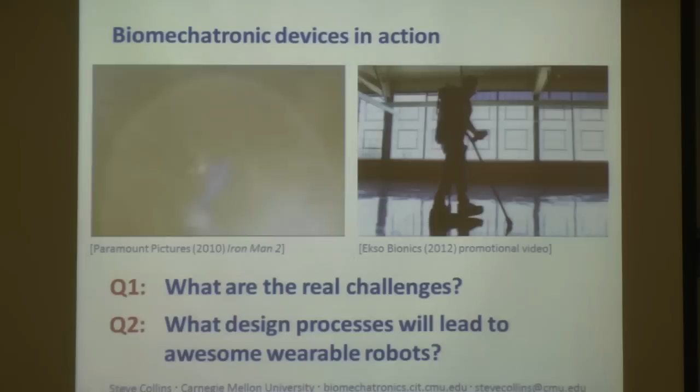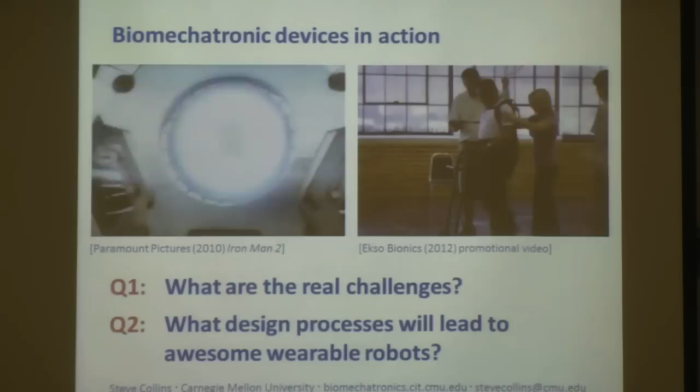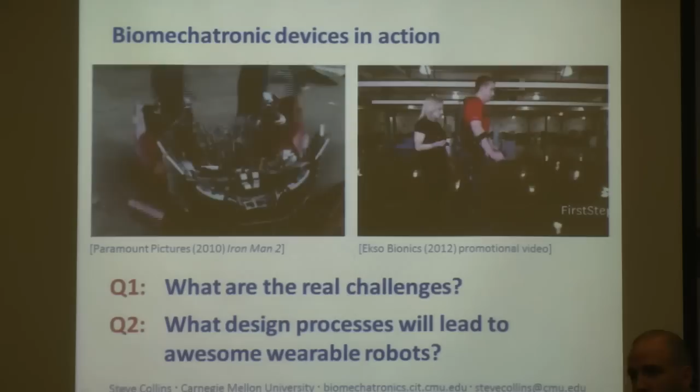And the second question, kind of a corollary, is: if I gave you a big pile of money and a talented team and five years and said go out and make real progress in this field, build a foundation for future work, what would you do? What kind of processes should we go through that have a high probability of success and make lasting impact? I'm going to argue that what we do in that exact scenario is ineffective and inefficient, and I think it's partly responsible for our slow progress.

And I'm going to propose an alternate process that I think has better potential. I think the best way to make this case is to take you along the path that I've taken to coming to this conclusion. And it starts a long time ago, in time with poor graphics, in a lab where we were using very simple models of locomotion to try to understand robot walking.

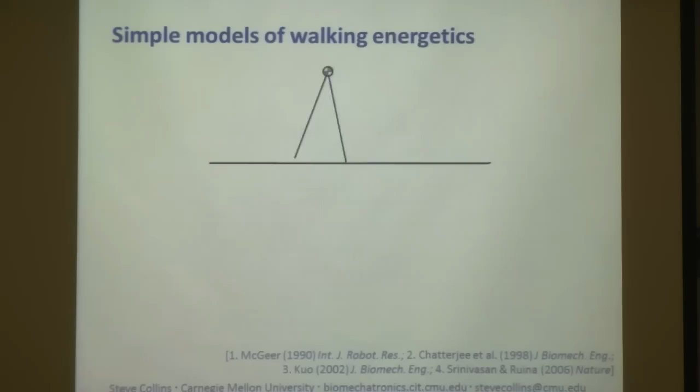This is arguably the simplest model of walking. We have a point mass representing the body, inextensible legs with negligible mass, gravity, a ground, and cyclic stepping. In this very simple model, we can make some statements about energy use.

First, the best thing to do during the middle of the step is nothing—vault up and over your stance leg like a pendulum. But at the transition between steps, you have to redirect your center of mass velocity. If you do nothing, your leading leg will land, you'll have a collision, and you'll dissipate a bunch of energy. Since this is a steady state behavior, every joule of energy you dissipate has to be resupplied at some point in the gait cycle. It turns out the most efficient way to do that in these simple models is by push-off of the trailing leg, because that partially redirects the center of mass velocity and thereby reduces the collision and the overall mechanical energy requirements.

So inspired by these models, we wanted to build more efficient walking robots. At the time, and actually to this day, most walking machines use an order of magnitude or many orders of magnitude more energy to get from A to B than a human. And coincidentally, almost no walking machines embody any of these principles.

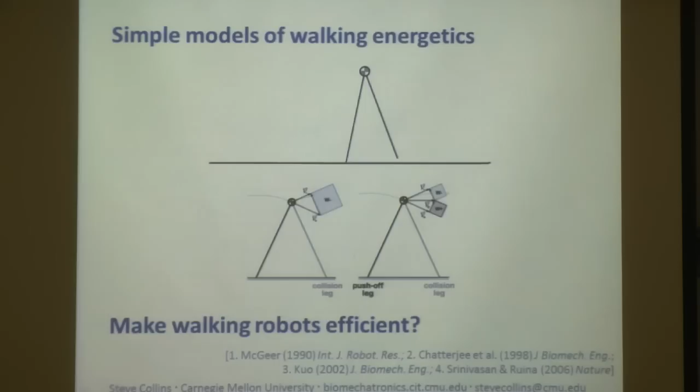So we designed a machine that does, and it looks like this. It's mostly passive—there's a hip with no actuation or control, knees that have almost no actuation but little latches to keep them from buckling during the middle of the stance phase. And all of the energy is supplied at the ankle, once per step, through trailing leg push-off.

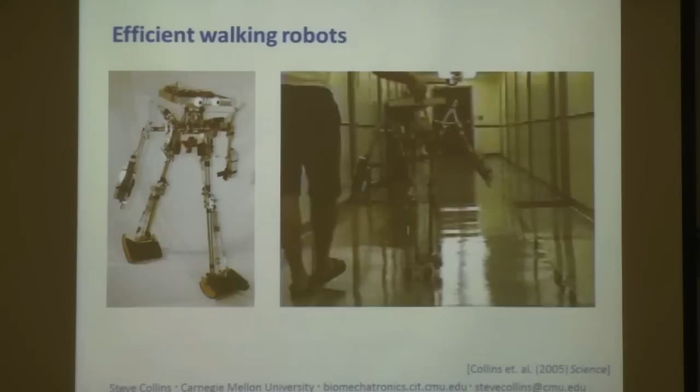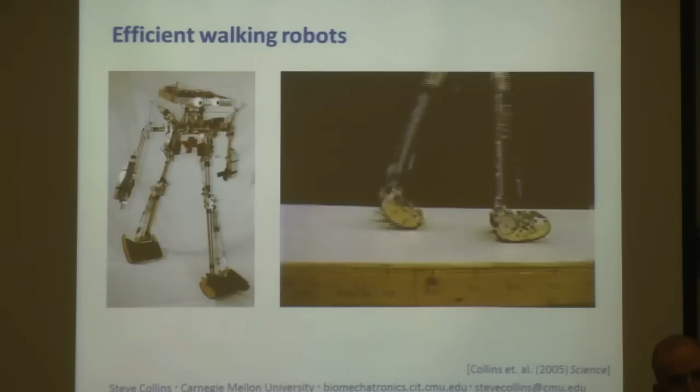Oh, can I get here? Yeah, and you can see that best here. So you see, just as the leading leg is about to land, the trailing ankle will move a little bit—that's it, that's how we inject energy into the system. And using these strategies, we're able to match the cost of transport of human walking.

This is cost of transport, energy used per unit distance traveled and unit weight. Our machine had a similar value to that of humans, and 15 times lower than ASIMO, which at the time was the most efficient walking robot in the world. So we were very excited about this result.

I was especially excited because I thought maybe we could take this and use it in devices that directly assist humans. But first, let's take a look at natural human walking and see if any of these ideas are relevant.

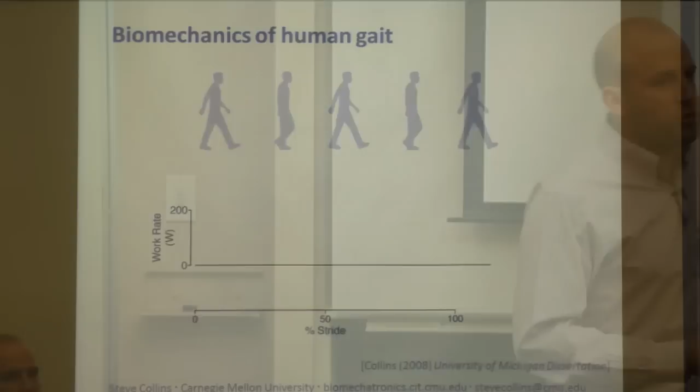Humans are very complicated. We're a big pile of cells with hundreds of muscles, and each muscle has lots of fibers, and there are all these neurons, a very complicated thing. So we use a couple of abstractions to try to understand the mechanics of gait from a mechanical engineering perspective.

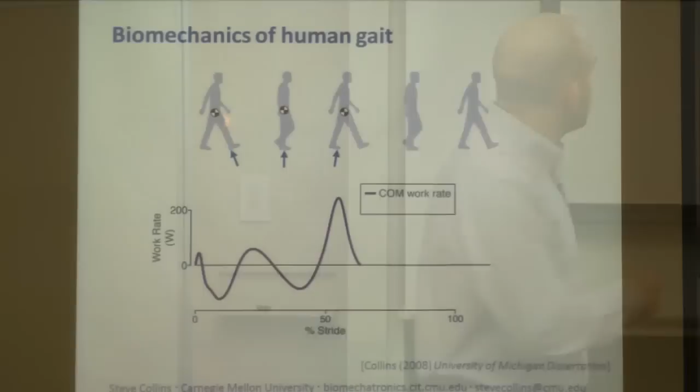One is to look at center of mass work. If we consider the center of mass of the body, and everything between the center of mass and the contact of the ground as a leg, we can get a rough understanding of the work done by that system by taking the dot product of the velocity of the center of mass with the ground reaction force. When you do that for each leg individually, you get curves that look like this.

I'm going to show lots of curves where we have time on the x-axis, normalized to percent stride. Typically these will begin with heel strike of the leg we're looking at, and 100% will be heel strike of the same leg, the subsequent heel strike.

If we look at the work performed by this effective leg, you get this initial negative work phase, some stuff in the middle that I want you to ignore, and this big positive work phase at the end of the step. Looking at this through the prism of our simple models, maybe you can think of this as being the trailing leg push-off, and it happens just about the same time, a little bit before this other thing, this negative work phase, by the leading leg, which maybe we think of as collision. So perhaps these ideas are relevant to human walking.

Another way to look at mechanics of gait in humans is to consider the body as a set of rigid links and look at the work done at joints, using inverse dynamics analysis, for example. When we do this and look at the joints of the lower limbs, one joint in particular seems to account for most of that push-off, and that is the trailing ankle.

So we wanted to see if there was a population where we could apply these ideas and maybe improve performance. Something that jumped right out of the literature is people with lower limb amputation. When you have part of your leg removed, you typically are fitted with one of these conventional passive elastic prostheses.

Now, 20% might not sound like a lot at first, but that's about equivalent to wearing a backpack with 20% of your body mass in it all the time. In my case, like a 35 to 40 pound backpack, depending on the time of year, wherever you go. And a lot of times I will avoid carrying my 3-pound laptop across campus. So 20% is a very big, meaningful change.

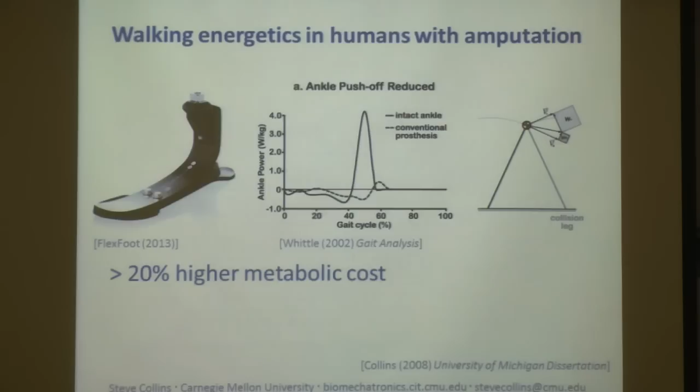So we thought, if we increase that trailing leg push-off, can we make it easier for people with amputation to walk? One way to do that would be to take a big motor and battery and stick it on the ankle and just drive that push-off phase.

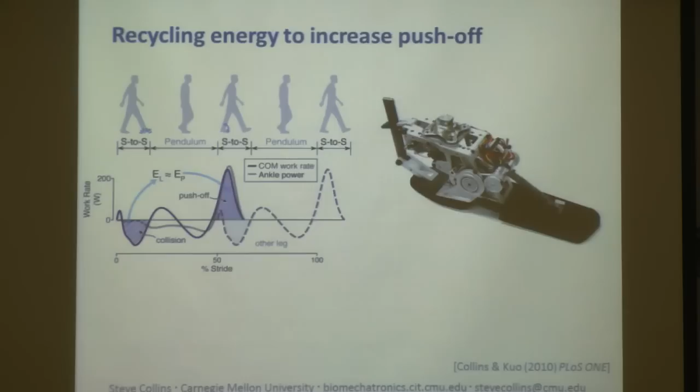But we noticed that the energy dissipated during this collision is of a similar magnitude to the energy required for push-off. We thought, maybe we can capture some of that energy that's normally dissipated and recycle it usefully for push-off. So we designed this very specialized prosthesis to do just that. You can see right at heel strike, this big spring here is compressed.

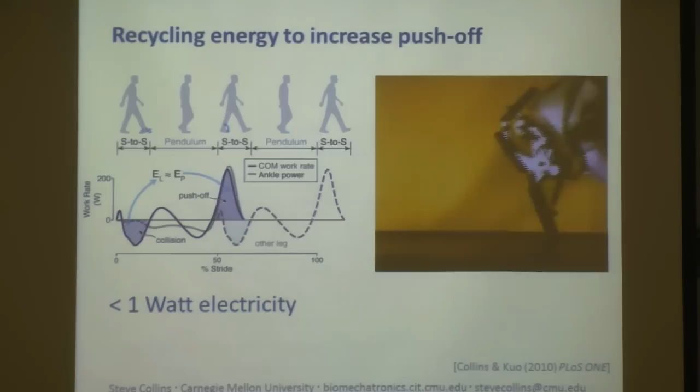It stores a lot of energy. That energy is locked in place. Later in the step, a separate latch releases the toe. The toe vaults forward, and all that energy is returned to the person's body.

Using onboard sensors, we could tell that we are indeed capturing and returning energy as we had wanted, which is cool. But does it provide the expected benefit to human users? Well, the only way to figure that out is to perform an experiment on people, and that's what we did.

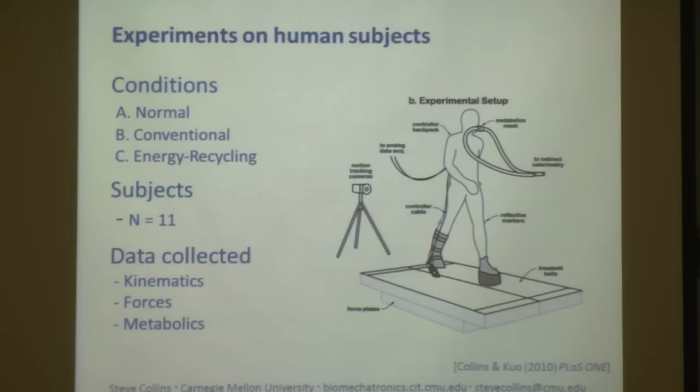So we collected some pretty typical biomechanics measures. We had people walk on an instrumented treadmill that measures their ground reaction forces. We measured the positions of their body segments using a motion tracking camera. We measured the oxygen and carbon dioxide that they consume by sampling the gases that they breathe. And this is what that looks like in hardware.

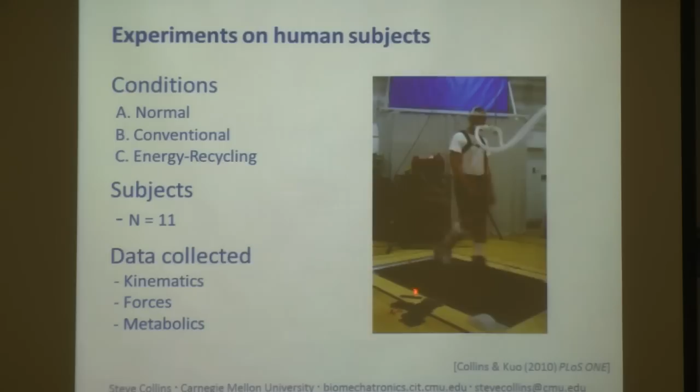And we considered 3 different conditions. First, we had people who are not amputees participate in the study, and we simulated amputation in some conditions by locking out their ankle joint with a simulator boot that has a little attachment on the bottom to which we can attach different prosthetic feet. We compared biomechanics outcomes while people walked in their street shoes, while they walked with one of these conventional prosthetic feet, and while they walked with the energy recycling device.

As expected, when walking with the conventional foot, ankle push-off work was reduced, and center of mass push-off work was also reduced. The energy recycling foot captured energy that would be normally dissipated, then returned it, which resulted in increased ankle push-off and increased center of mass push-off. At the same time, we observed the energy penalty for walking with simulated amputation was reduced.

So this is the energy cost for walking in street shoes. When people put on the simulator boot and conventional prosthesis, energy cost went up by about 23%. With the energy recycling foot, energy cost was only 14% higher. So you could say it's a 10% reduction in energy cost.

The design of this device took 5 years before it was robust enough to withstand the about 100 hours of testing and training required to get the outcomes that we care about. Any change that I want to make to that device takes, optimistically, months, and realistically on the order of a year to implement and refine and get it robust enough to test.

And that leads me to my first point, which is specialized devices like this one are not good experimental tools. They do one thing really well, and they strongly limit the types of experiments you can do.

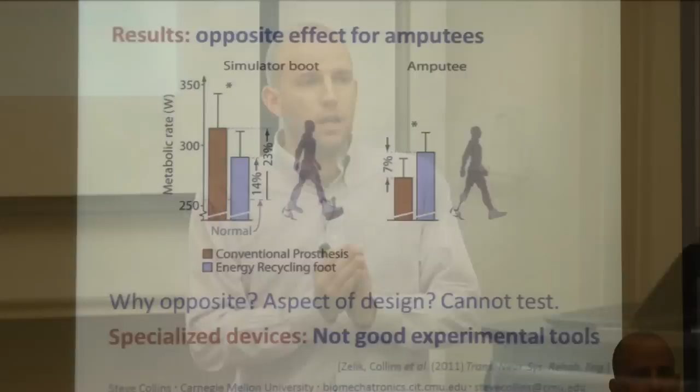One of the factors that we think might have been important in these experiments is the shape, the effective rollover shape of the foot. And as we were refining our energy recycling foot, we discovered that if we put little pieces of foam on the bottom, it felt a lot easier to walk on the device. Later on, we actually did a separate experiment where we systematically varied rollover shape in a controlled way and found that can make a very big difference, 50% change in energy cost or more.

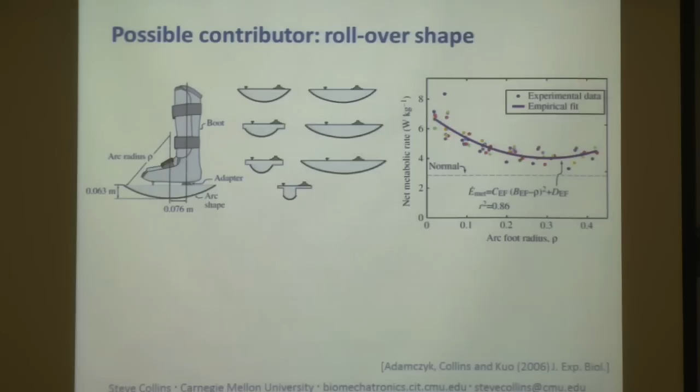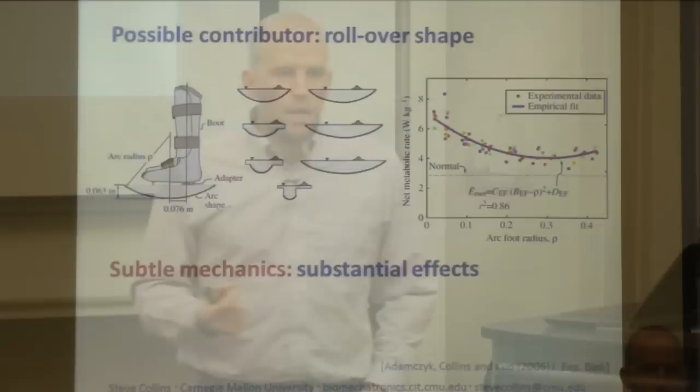We didn't think when we set off on this that those kinds of factors would be important. And that illustrates an important point: people are so complicated and unpredictable that very subtle factors can be really important, things you wouldn't expect. It also illustrates that as we're designing and refining these specialized devices, secretly we were performing an optimization, but we didn't realize that the thing we were changing was important.

And we probably did this in lots of ways, right? There are all kinds of choices you have to make in the design of these devices that we didn't think of as being most important, but may have had a strong impact on results.

That leads me to a third observation: when you perform an experiment that is an A-B comparison, this complex device versus that complex device, and there's a change in some performance measure, we really wanted to say the reason for the change in energy cost was the energy recyclingness of the energy recycling foot, right? But maybe it had nothing to do with that, and it was about stiffness of the keel, or stiffness of the spring, or rollover shape, or something.

So if we look back over this, which is a very typical example of the development process used in biomechatronics right now, and look at the tools available to us, here's how I would assess them. What good are simple models and intuition? Well, we need them, right? You need them to develop hypotheses, to inspire designs, and to help you interpret results of experiments. But they are not good enough to lead you to the design of an effective device.

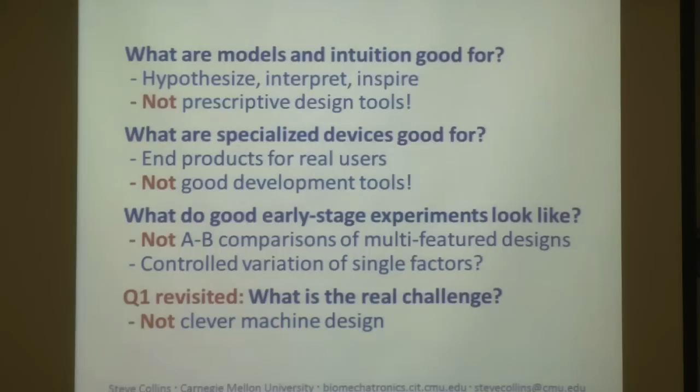Which brings me back to the very beginning. What is the challenge? What is hard about developing these devices? I would argue it is not how to design specialized robots, right? Over the last several decades, we've gotten really good at making machines that meet design requirements. We've got CAD tools, we've got finite element analysis, we've got dynamics simulation software. All that stuff helps us make very good predictions about whether something is going to work or fail. And we're very creative and good at these problems. We like these problems.

But that is not the real challenge. The real challenge is predicting how the human will respond to forceful interactions with these devices. And that's where we don't really know what's going to happen. Another way of putting it is the Tony Stark problem, right? As roboticists, we get really geeked about the tech side, how to make the thing do what we want. But we haven't asked what functionality we should be using. We haven't answered that question adequately yet. And that's what our research is seeking to address.

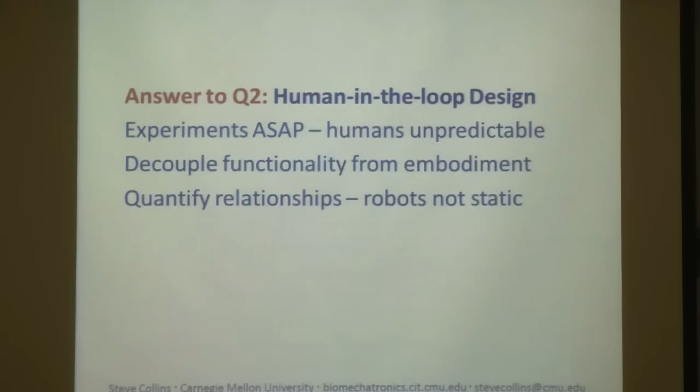I think the way to do this is what I like to call human-in-the-loop design. Get to experiments with people as fast as possible, because that's where all the new information comes in. Close the loop as soon as possible. And try to decouple the functionality you're testing from the design of a specialized device, so that every time you change something, it doesn't require years of development. And finally, instead of doing little data points, try to quantify design relationships.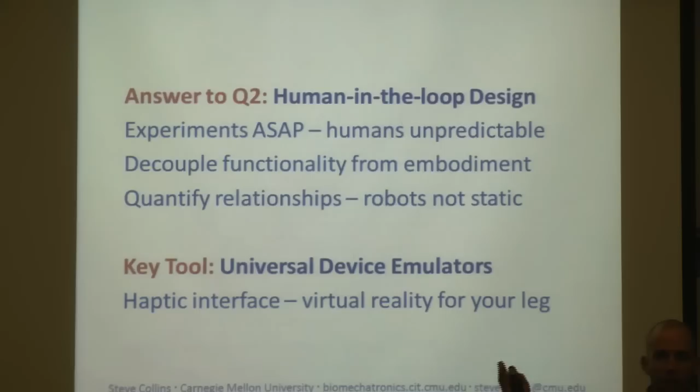The tool that we think enables this approach is something we call a universal device emulator. It's like virtual reality for your leg. It's a haptic interface: you put it on the body, and it pretends to be some proposed wearable robot design. Then you can evaluate that, and you can change aspects of it in a controlled way and see how people respond.

So we built some of these, and here's one. This is a universal ankle-foot prosthesis emulator, and it has three main components. First, there is a lightweight end effector worn on the body.

Second, we have a tether that connects to very powerful, capable off-board motor, actuation, and control hardware. This is what it looks like in our laboratory, which I share with Hartmut Geyer down in the basement of Wean. This is our 2 kilowatt AC servo motor, weighing in at 15 kilograms. Lots of power, right? You can see the tether and stuff a little bit better in this picture. Here we have a Bowden cable coming in.

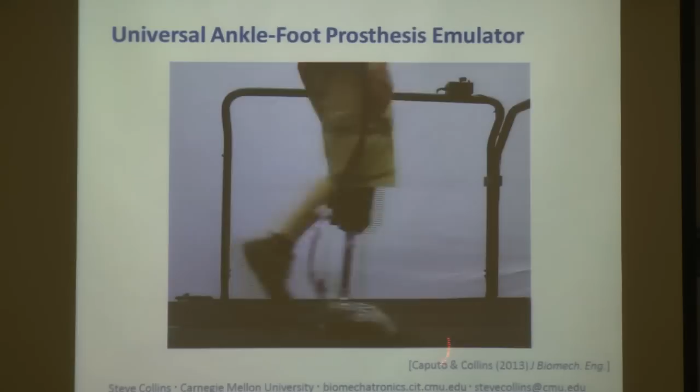That's how we transmit mechanical power. And this instrument end effector, the person walking here is a unilateral transtibial amputee.

You can see the end effector a little better if we slow things down. It has one axis joint. We sense the position and we sense the torque using a spring, measuring the position of both ends and calibrating that measurement, along with a series elastic element which helps us achieve good torque control.

Now I claim that this is going to enable us to be versatile and high performance, and here's the proof. We've done some benchtop tests and found that we can measure the torque really accurately, and we can change the torque very fast.

This is a step response, a rise time of about 60 milliseconds, going from 0 newton meters to 175 newton meters. For the uninitiated, a typical peak torque during walking at the ankle is like 100 to 120 newton meters, so that's a big torque.

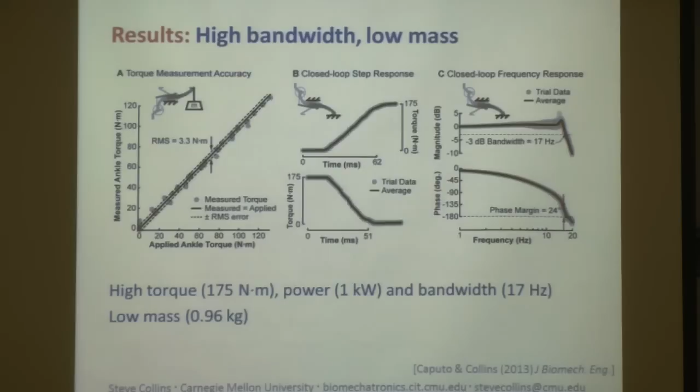One of the keys in a haptic interface is the closed loop torque bandwidth. That provides a limit on the fidelity with which you can emulate different dynamic elements in the design. Here we have a bandwidth of about 17 hertz, and the whole part that you wear on your body weighs less than 1 kilogram.

If we have a person walk using some control algorithm that I'll explain more later, we see there's a good match between the measured torque, which is the blue line, and the desired torque, which is the black dashed line.

If you look at it either in time domain or in this angle torque domain, we see a torque error of about 3 newton meters RMS.

Taken individually, any of these outcomes is at least twice as good, significantly better than any other prosthesis or exoskeleton for the lower limbs to date.

And when you look at the set of outcomes, we're typically an order of magnitude better, at least one better than everything else. And that's not because we're the cleverest mechanical design people, although we're not bad at that.

But it's because if you exploit the laboratory setting, give up on autonomy, stop trying to pretend to be a product, and embrace the fact that this is an experimental tool, things get a lot easier.

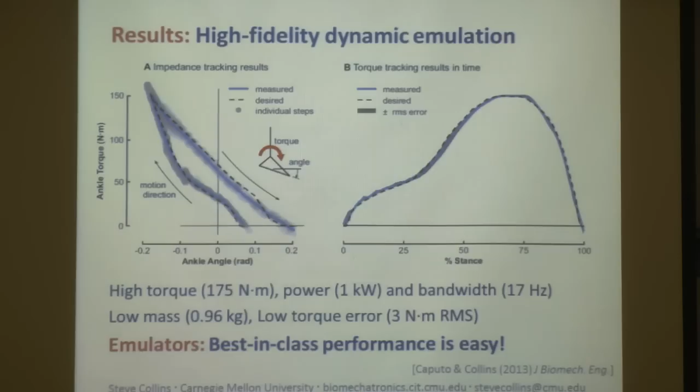Now, why should you care about this? Why is this cool? Number one, you can go from an idea for an assistive device to a test on a person in hours, not years. So many orders of magnitude reduction in time.

You don't have to be good at building stuff, and I say this in a room with lots of computer science people. All you have to do is code a little bit, and the device will express your ideas. If you are a builder, it's way easier to design these end effectors than an integrated system.

We've taken away the need to have control on board, energy on board, or actuation on board. Once that part of the system is solved, all you need is some mechanical structure that supports and moves around, and a little bit of sensing.

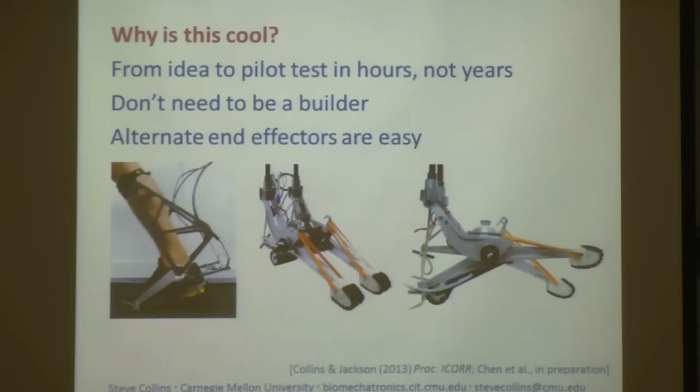These are a couple of end effectors that we're currently using. This is an ankle exoskeleton, and this is a 2-degree of freedom prosthesis that does both plantar flexion and inversion, eversion, or pitch and roll if you like.

We're really excited about these platforms, not only for research, but as potentially commercial tools for a clinical setting, where with the right interface, a person could use these to let a potential user of a robotic prosthesis or exoskeleton try different devices available on the market before they're prescribed, and even tune parameters for those devices so the person can experience it before it's built.

To give you a point of reference, the BiOM, which is maybe the most advanced prosthetic ankle on the market, costs over $100,000. So before you mortgage your house, you want to make sure that this thing is going to be effective for you.

Now, we're also, of course, interested in using this as a research platform. I'm going to tell you about a few experiments that we've been doing, one in a lot of detail, and then I'll touch on a few other experiments we've been performing in our lab.

And the first is about ankle push-off work. So let's come back to this idea of augmenting push-off. We think it's important, and we think that maybe more work done by the ankle is better in terms of energy cost for the person.

But more work also implies a heavier motor and batteries, which we think is bad for performance of the person. So in order to make a rational decision in the design of an autonomous robotic ankle, we need to quantify the benefits of more work so we can weigh them against the costs of bigger motors. And no one has done this in isolation before. So we set out to try, and we designed a controller that's well suited to perform this experiment.

It operates in joint angle versus torque space. If you take normal ankle function and project it into this space, you get curves that look like this gray line. During most of the step, you have this dorsiflexion curve where the ankle is, your toes are getting closer to your knee, and torque is increasing. And then at the end of the step, you have this plantar flexion phase, and torque is decreasing. This is a displacement force space, so area under the curve is work, and the area inside the loop is the net work over the course of a cycle. We call it a work loop.

So we did that. We had 10 people walk, and here's what we found. First of all, we are able to vary the net work provided by the device over a big range, up to values approaching 4 times that of the biological ankle, so big range. This is, just to give you another perspective, power at the ankle joint, and you can see we're getting more than 2 times the peak power, so half a kilowatt at the ankle joint is lots of power.

And we measure metabolic rate, we're able to create this figure. And this is the key figure. This is the kind of figure that I would like to see lots of groups produce. This is it. This is the thing that we think matters, the functionality that we think gives some benefit, and the benefit that we think can be achieved with it, right?

In our case, the net prosthesis power on the x-axis and the net metabolic rate on the y-axis. If we put in the data from 10 subjects, and each set of colors corresponds to a different individual, we see that, as we kind of expected, increasing push-off tends to decrease the user's energy cost, which is cool.

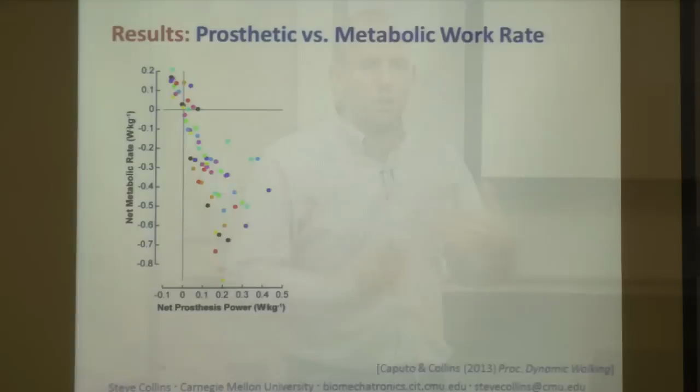There are a couple of landmarks in this space that are interesting. The first is a line with a slope of -4, which is what we might expect if every joule of work performed by the device exactly replaces 1 joule of mechanical work performed by muscles in the person's body. That's because muscles have an efficiency of about 25%. And you can see for some subjects, they're pretty close to operating along this line.

But on average, there tended to be a diminishing return as we increased device work, and this is an exponential fit to that curve. Interestingly, energy cost of the user tended to continue to go down even as prosthesis power got way bigger than what you observe in the biological ankle.

So many people have an intuition that the best thing we can do with a robotic device is exactly imitate what the biological system does, right? Now, what exactly that means, if you start to really parse it, becomes ill-defined most of the time. But even in this particular outcome measure, we see that normal walking is somewhere in here, and clearly more work by the device is better. If you reflect on it, maybe that makes sense, because the cost structure is different, right? You pay for more work by the device, but you pay for it in a different way than you pay for work performed by your own muscles.

Right now this is all data from experiments with simulator boot, and we are repeating the experiment with amputees. I think we have 5 subjects enrolled and 1 subject who's completed the protocol. The results are very interesting, but you won't hear about them today.

That sort of wraps up the experiment I want to talk about in detail. Now I'd like to touch on a bunch of other little factors that we think are interesting.

One is the timing of push-off. The amount of work in push-off is important, and the same models that predict that also suggest that the timing of push-off is important. But it's very hard to change the timing of the onset of positive power at a joint independently from the magnitude of work performed at that joint. This has confounded lots of other experiments that tried to get at these ideas.

Fortunately, when you have a 2 kilowatt AC servo motor, you can just make the joint do whatever you want, whenever you want, and that's what we did. We forced positive work onsets at very early and very late times during the gait cycle, and found that it does matter—timing matters, which we expected. In fact, with poor timing, the effect is as if you provided no work augmentation at all. That is to say, you're just throwing the energy away with no benefit to the user.

And with optimal timing, you can get a substantive benefit, which is cool. In fact, with really bad timing parameters, people have a very hard time walking.

Now, all these results so far have been for prosthetic devices. We're also interested in exoskeletons. Perhaps counterintuitively, exoskeletons offer a wider range of assistance approaches because the device operates in parallel with the person's joint, and so you can let the person bear some of the burden of moving the leg around, right?

One of the things that people have often suggested in the literature as a way of assisting and improving performance during locomotion with an exoskeleton is to provide a torque at the joint that's similar to the torque normally produced by the biological tissues at the joint, but perhaps scaled down—a scaled version of the same torque pattern at that joint. This seems reasonable as a first guess, right?

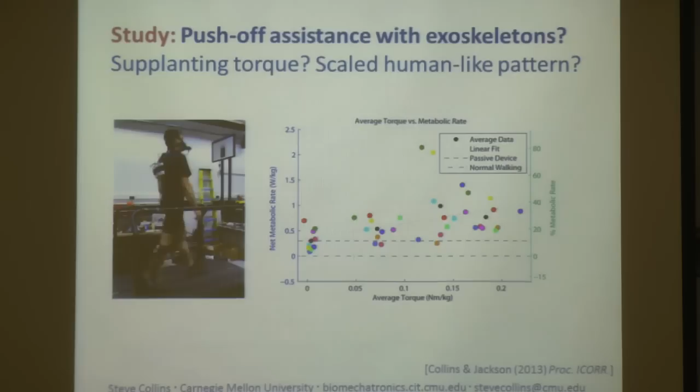But we have recently completed a test of this idea that suggests that actually it's not very effective. Perhaps counterintuitively, as we scaled up that average torque at the joint following a similar pattern, energy cost of the user increased. Somehow we're interfering with gait instead of assisting it with this kind of approach. It might have to do with mechanics at the muscle fascicle level, which we're starting to investigate.

These are hot off the presses. I don't know the answer yet. But it may have to do with, counterintuitively, you can increase the work requirements of a muscle fascicle by decreasing the torque at the joint. The reason is that muscles are in series with tendons, typically.

So if a person has tuned their gait so that the muscle fibers remain isometric most of the time, and mostly the tendon just stretches, they mostly bounce, and then all of a sudden you reduce the amount of torque at that joint, now to follow similar kinematics, the muscle fibers have to move a bit, right? And if they were moving zero at first, and now they move a little bit, even though the force has gone down, the work done by muscle fibers can go up.

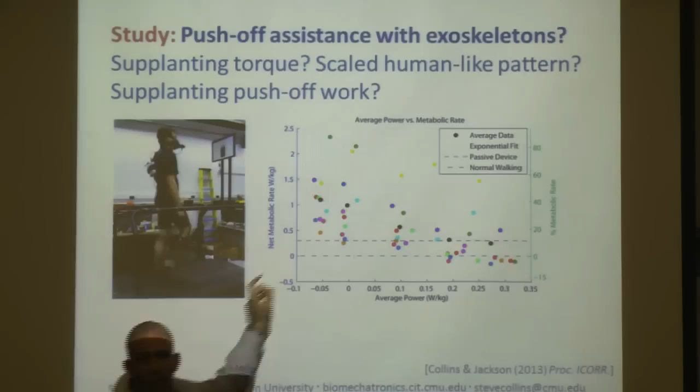When you put on the device and turn it off and have it completely passive, energy cost goes up. This is something that's observed over and over again with these kinds of devices. There's a little bit of mass added to the leg, you restrict motion of the joint a little bit, and maybe there's some envelope issues that interfere with the way you'd like to move your limbs. And many people have demonstrated that with appropriate actuation, you can do better than the penalty for wearing the passive device.

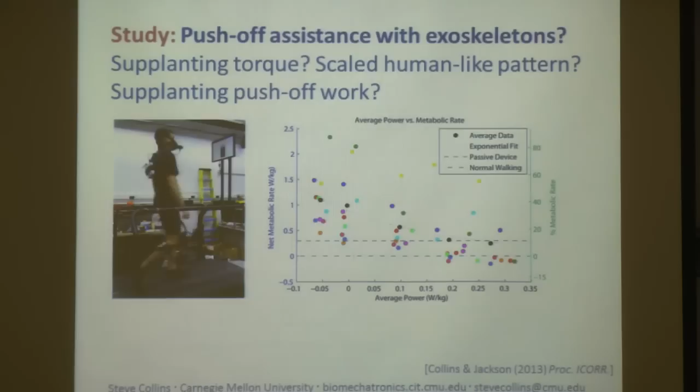But what before last year had never been demonstrated was doing so well that you more than make up for that penalty and actually improve over normal walking. It's the so-called normal barrier of energy cost during locomotion that has only recently been broken, and we are one of 3 groups that have done this in the last 12 months. One is in Ghent, one is another top-tier US university that hasn't published their results yet. So we're pretty excited about this.

Now, in some pilot work that preceded this parameter sweep, we found that we could reduce energy costs below normal levels by up to 20%. So we then improved our controller a little bit and performed the bigger study on 10 subjects. And the assistance controller seems almost the same, just a little bit easier to learn.

However, the benefit somehow has been reduced or eliminated for some subjects. And so, that's not what you want as an engineer, right? But as a scientist, it's interesting. And we're beginning to probe this and try to understand what are the factors that aren't obvious when you first look at the intervention, but actually have a big impact on performance.

And I'm confident that sooner or later we're going to figure it out. And our calculations suggest that this can be translated into an autonomous device that still has a net benefit during walking. And we think that'll be cool for, say, elderly individuals who have trouble getting around.

And whenever I say this, somebody usually during the question session will raise their hand and say, wait, you're trying to make it easier for people to walk? Don't we have an obesity epidemic in this country? Shouldn't we be making it harder so people get more exercise? And implicit in that question is the idea that if we make each step a little easier, people will get a little bit less exercise from walking over the course of a day or a week. Now, I think that's a perfectly good hypothesis. I happen to have the opposite hypothesis. I think that if you make walking a little bit harder, people avoid it so much that the net effect is less exercise from walking activities over the course of a week.

And we are currently testing that idea. We have an experiment where we send people out into the world wearing shoes that are carefully instrumented so that we can accurately track how fast they're walking and at what uphill or downhill slopes. And then we can bring them into the laboratory. We perform a parameter sweep on a treadmill, and then we can attribute metabolic rate with each step, or metabolic energy cost to each step that they've taken. And we have two conditions, one where their energy cost is about normal, and one where the energy cost is increased by about 15%. And there are a couple of interesting things that have fallen out. We're very early stages, but first, getting people to complete the protocol has been a bear.

We've had an incredible dropout rate, and even the experimenters refused to complete a 2-week trial wearing the device that increases energy cost a little bit, in the one subject. So we've been gradually stepping down the penalty to try to get compliance with the protocol. In the one person who completed it, the result was shocking - I don't know if I even believe it. It was a 3-fold reduction in the number of steps taken over 2 weeks. 3-fold, with just a 10% increase in energy cost, 3 times less steps. Crazy, right? So stay tuned, more to come on that.

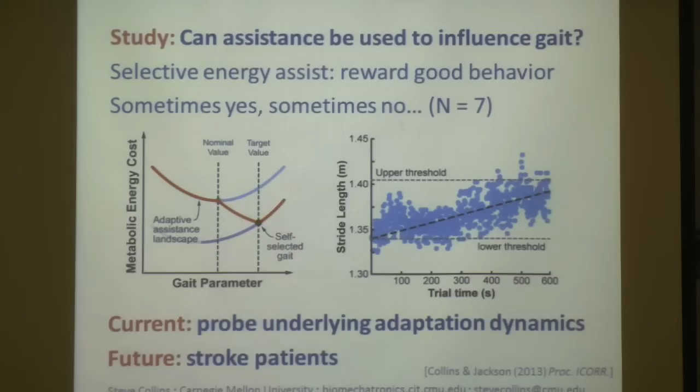Another fun thing you can do when you manipulate energy cost is manipulate it selectively to reinforce desirable behaviors, for instance as part of a rehabilitation regime. During rehab, a clinician typically tries to use social pressure to convince you that you should work harder and use the paretic limb more. It's hard and it sucks, but if they're a nice person and you want to make them happy, maybe you do, or you're really motivated to get better. We think it would be cool if you could change things so that instead of the easiest behavior corresponding to a long-term poor gait strategy, it could correspond to some desirable behavior that will in the long term improve performance. I don't have enough time to explain this properly - it's a little complicated, I apologize. But we're interested in these kinds of problems, and so far our results are a little mixed. Sometimes people adjust their behavior as we want, and sometimes they don't. There are very complex adaptation dynamics involved, and we're starting to probe those things. Hopefully the results will someday have an impact on patients who've had a stroke.

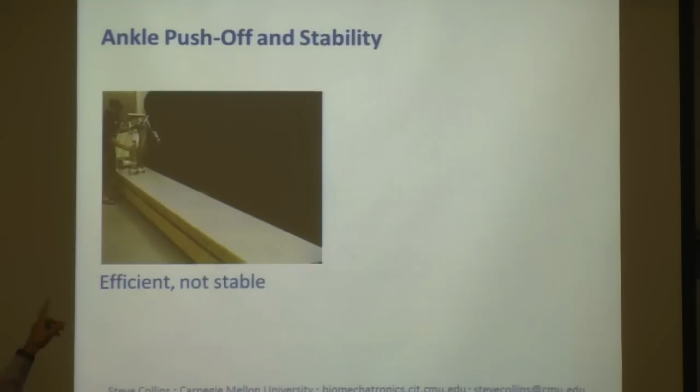Okay, so that's a lot about energy cost. What about stability? Balance also matters. Every time I show that figure with the cost of transport bars, I have a pact with myself that I must show this video of a very efficient but extremely marginally stable robot falling down.

However, the same group has recently produced a robot that is both very efficient and very stable. This is the Cornell Ranger. Our own Pranav Bhounsule - is Pranav here? Not right now - was a key member of this team. This machine recently walked 65 kilometers, setting the distance record for robot walking. It's a planar machine, which helps a little bit.

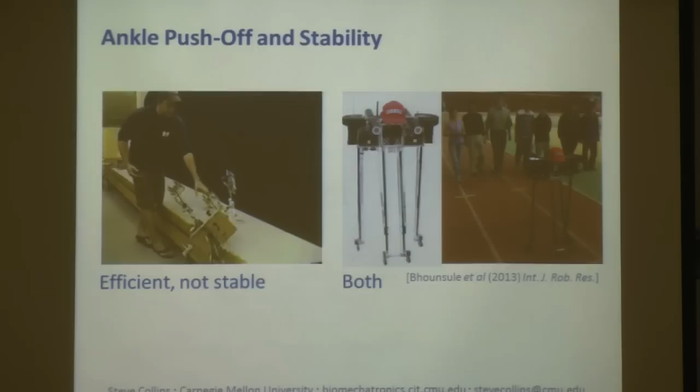The control algorithm that keeps it stable looks at its state once per step, and decides two things: first, how far of a step to take during the next stride, and how much to push off with the trailing leg during that period. So we've been thinking about these kinds of control strategies and wondering if we can apply them to, say, prostheses to improve stability for amputees. Now, humans are three-dimensional creatures, so we can't exactly translate the Ranger control algorithm. We had to develop some of our own, and we used a 3D model to do this.

Here we have the machine walking on uneven ground. The robot doesn't know what the floor height will be on the next step, and this presents a disturbance. What we wanted to know is what kind of control inputs are most effective at recovering from these disturbances. Everybody knows that foot placement is important in these 3D models of walking, but what if you can't control foot placement? If we only have access to the ankle of a person with amputation, can we do any good just by modulating torques or work at the ankle joint?

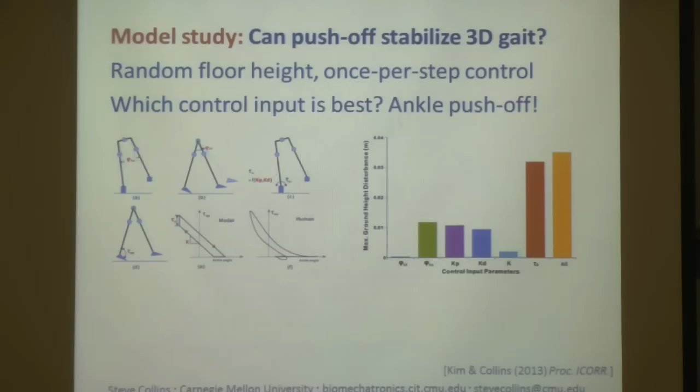So we looked at a bunch of different control inputs - again, changing something just once per step, either step width or step length, or the combination of the two, or doing ZMP-like center of pressure modulation of the stance foot, or modulating the amount of work delivered by the trailing leg during push-off. To our surprise, in these simulations we found that under most disturbance conditions, modulating trailing ankle push-off is the most effective at recovering from these random disturbances. These are the different control inputs, this is for modulating trailing ankle push-off, and this is for the combination of everything, with the y-axis being the magnitude of the random disturbance. This gave us some hope, and we thought maybe we can translate this into a controller for hardware that really helps people with amputation.

And these, again, are results hot off the presses, just in the last week. We found that, yeah, we can.

So first we extracted a simplified version of the controller that only uses a couple of states, mostly having to do with the side-to-side position and velocity of the center of mass of the person, which we're capturing using cameras. We found that if we apply a closed-loop feedback gain that our simulation suggests should be stabilizing...

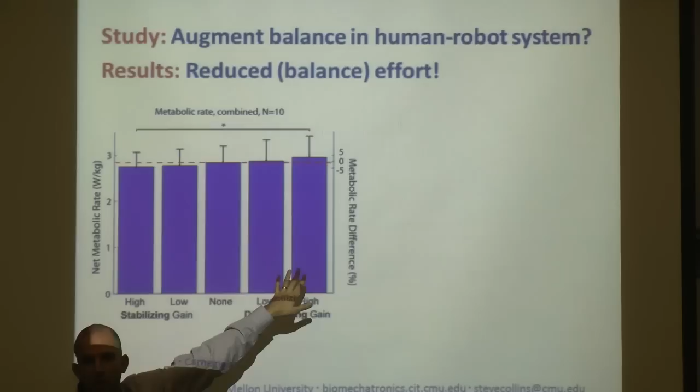energy cost goes down. If we apply the opposite gain, energy cost goes up. Everything else is the same. The average behavior across conditions is the same. The only thing that's changing is the response of the device to small changes in the state of the person.

So we're going to argue that this energy cost is associated with balance, and we've somehow reduced the effort of balance with this controller. And I think this is the first wearable robotic device that's ever done this.

Now, usually people don't fall down when they're walking straight ahead at steady speed. And the thing that causes you to fall down is you get pushed, you get tripped, you slip, or some other big disturbance. So we're also interested in expanding our work into recovery from large disturbances.

And I'm working with Hartmut on this environmental emulator, this kind of system where the person's walking along, and unbeknownst to them, at any moment they might step on a piece of ice, or they might get shoved to the side, and then they hopefully get very close to falling down. Maybe sometimes they do fall down, and catch them with the harness, and they make them keep walking.

Developing prosthetic knees and exoskeletons for the legs that help recover from those disturbances.

Okay, so if you couldn't tell, I think that these universal emulator devices are a really important tool for biomechatronic device design. And the reasons are, you can go from an idea to a test on a person very fast. The type of experiment that you can perform on people is more powerful. You have better experimental design.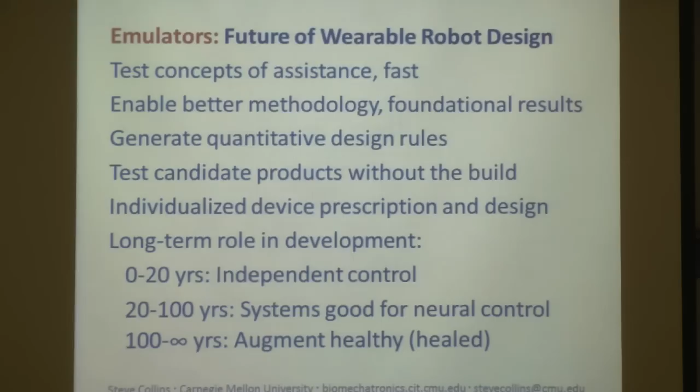Over the next 10 to 100 years, I think that these platforms will continue to be really important. In the next 10 or 20 years, we're going to continue to have a type of development where we essentially have these autonomous robots. They do their own thing. You attach them to a person's body, and then hopefully you design them in such a way that the person can make use out of them, right?

Hopefully they respond appropriately to their environment. And in these cases, they're big control and design challenges.

In about 20 years, I'm hoping that we will have really good neural interfaces, direct neural control of wearable robots. And then the control stuff that we've developed in the next decade or two will just basically be useless. Throw that right out. The person will learn how to control the device and how to use it in all kinds of novel conditions and environments.

But we will still need to figure out what types of features the person can exploit best. So what kind of communication works well? Should we be telling the robot to produce a force or a position or velocity, just as a very primitive example? And so I think that these emulators will be important for those processes.

Of course, in the long run, biologists and doctors are going to beat us out. And we're just going to regrow amputated limbs, right? Or get gene therapy and completely recover from our strokes. And all this stuff becomes obsolete.

But we will still need to try to augment healthy human performance. And probably we'll be trying to do things that we can't even imagine right now with these wearable robotic devices. Big, big augmentation problems. And I think even then, it will be better to have some type of emulator than to spend lots of time designing product-like prototypes.

Another example is our timing study. It took us a long time to figure out exactly what push-off timing meant, and how to control the device so it changed the moment when positive power began. We went through lots of pilot testing—maybe five or ten rounds of different protocols before we arrived at one that we liked.

Or with the exoskeleton, we've tried lots and lots of different assistance regimes. Each one, if we were building an autonomous or specialized device, would have different implications. For instance, if we're just doing torque support at the ankle joint, you'd want something with a spring, because without net work requirements you can use a little cam and spring to produce just the right torque profile. But that device would never be able to produce net push-off work. Does this make sense? You know what I'm getting at?

But the big principle is: you think you know what the person needs, but you don't. The person is complex, they're tricky, they adapt in all these weird ways. And the most annoying part of the person is their brain—their central nervous system is very hard to model, very hard to anticipate. So don't spend a lot of time fooling yourself into thinking you know what's going to work. You don't. Get to the part where you put it on a person and find out what they actually do as fast as possible.